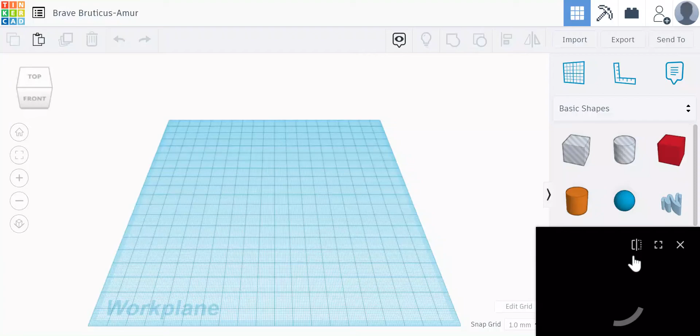All right, what's up, everybody? It's me, your design teacher, and I'm sitting here with this drawing, which I created in class, just like you did, and got it up here behind me as well so that we can reference it.

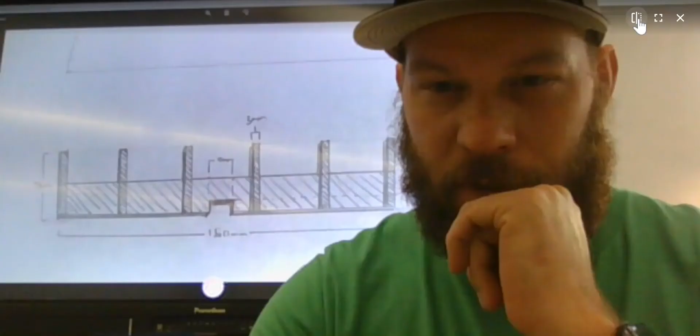Let's see, does this make it so we can read the... okay, yeah, the numbers are now correct.

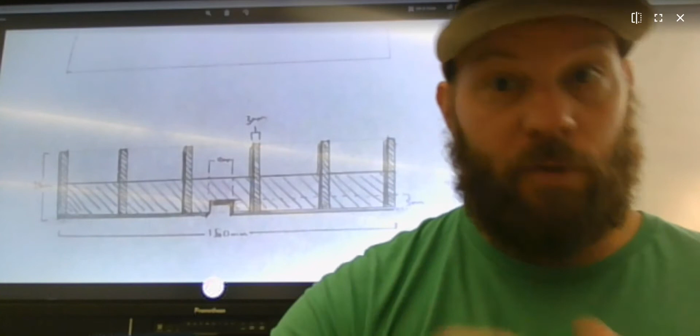So now that we have this drawing with the nice measurements, we can see we got 150 millimeters across, and this little hole here is 5 millimeters and it's 10 millimeters wide. We know the size of each of those things. We can go into TinkerCAD and start to make this thing in 3D so that we can send it to the 3D printer. So here we are.

TinkerCAD. This drawing is going to be all rectangles, so we'll just grab this rectangle right here and drag it in.

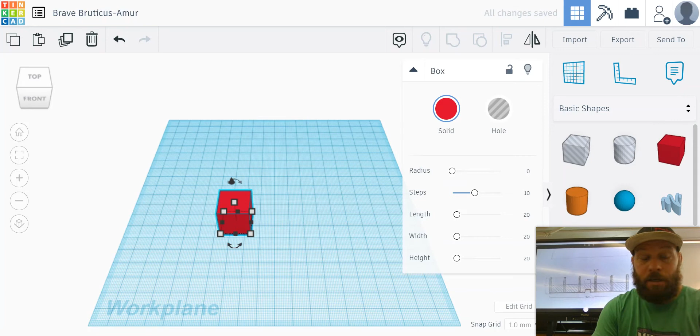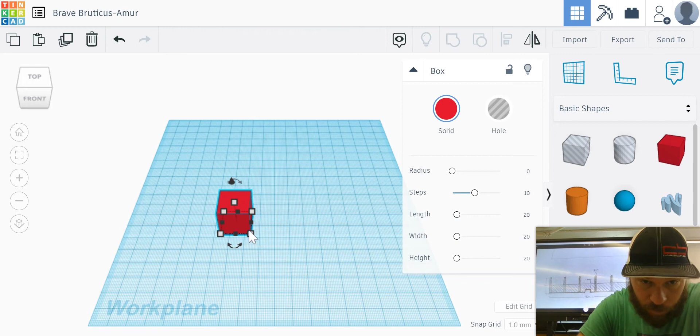Now I'm going to start out with the base shape, which is this big long rectangle here. It needs to be 150 millimeters wide and 15 millimeters long. I guess I didn't add that on this, but since I drew it, I know. So I'm gonna click on here, this is gonna give me these dimensions. This one's gonna be 150, and this one is 15.

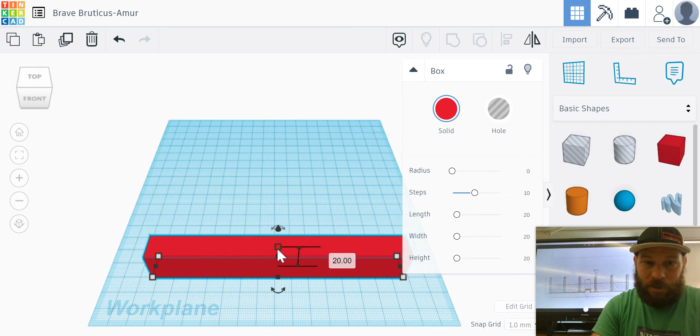Now, what is not defined on my picture is the width. You're gonna have to kind of decide on this. I'm gonna try some different things. What if this was half a centimeter? So this would be 5 millimeters wide. How does that look? That actually looks good to me.

I'm going to go with that. Remember, what we're looking at here is the actual size of the tool. So if it looks like the right thickness, now that we've set those original boundaries, it probably is.

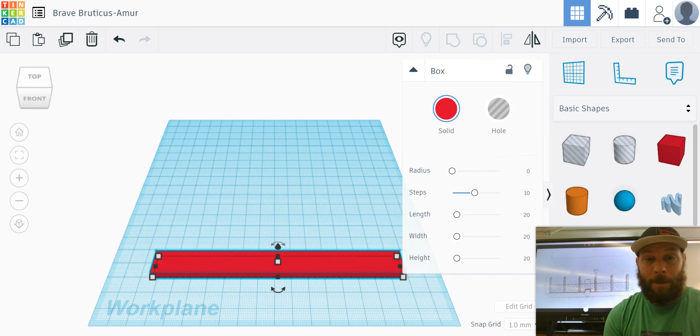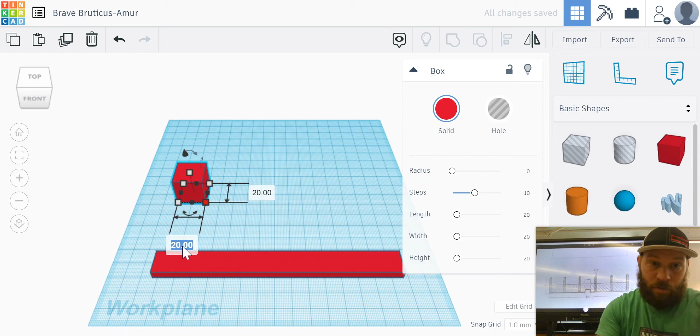Okay, so now I've got this main part. Now I'm going to add another rectangle that's 30 millimeters tall and only 3 millimeters wide. Let's see how that looks. So get this rectangle in here, change the dimensions. So this one is the width, so this is just 3 millimeters, and this is 30.

So it makes it nice and long, and I'm going to make the height the same as... actually, I think I'm going to make the height 5.

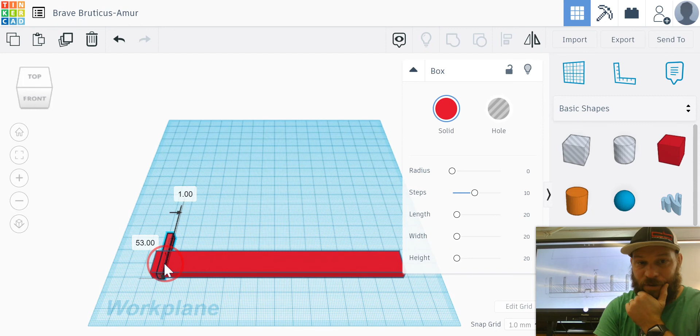Now, I've got kind of a problem here because it's not attached, and I could try to move it exactly to be attached, but I might not get it exactly. So I'm going to use the tool called Align, and this is going to be so helpful. I select both and then use this Align tool right up here.

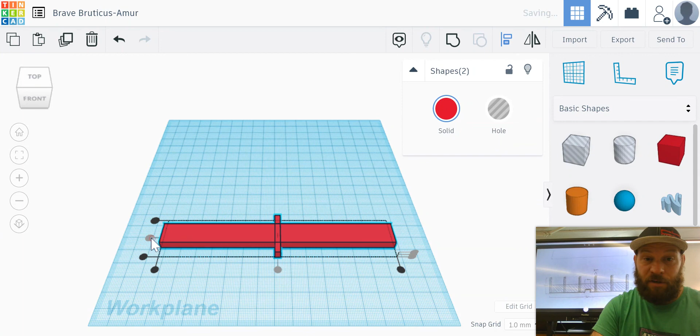Now, there's a lot of different ways I can align it. If I wanted them to be centered, I could click that button. If I wanted them to be centered this way, I could click that one, but I don't want that. I'm going to undo those things. I want them to be aligned on this edge and on this edge. So that puts that exactly where I want it to be.

Now I need to make a bunch of them. My drawing has 1, 2, 3, 4, 5, 6. I could copy and paste and try to put them exactly how I want them, or I could use the duplicate tool.